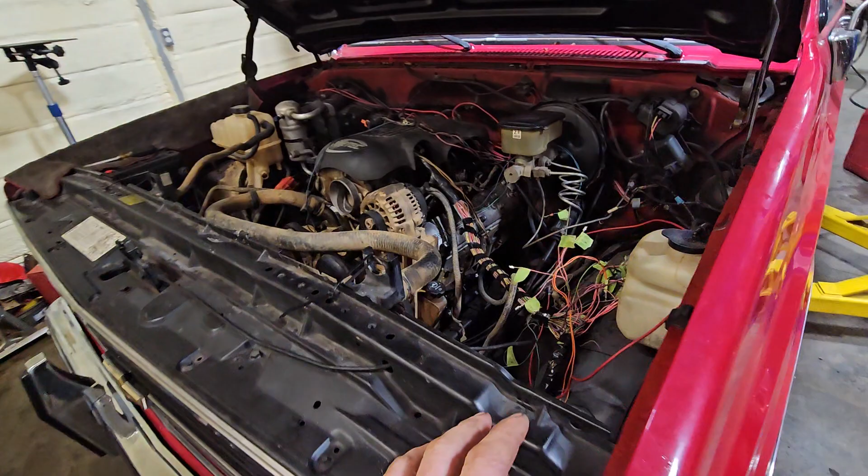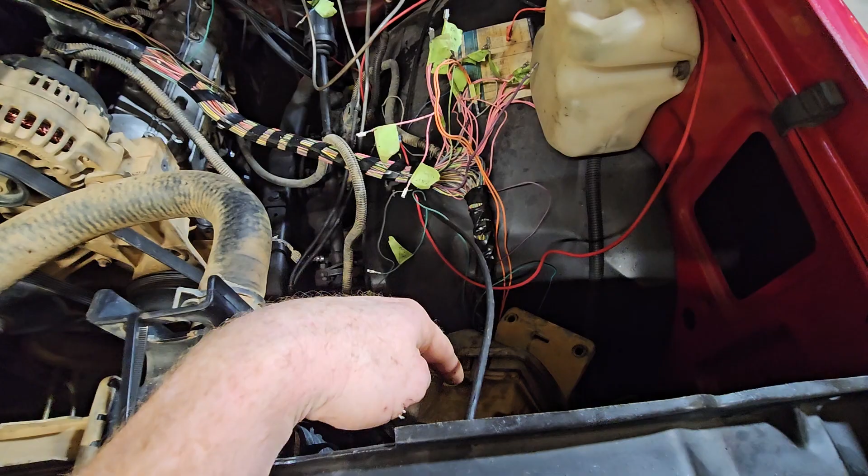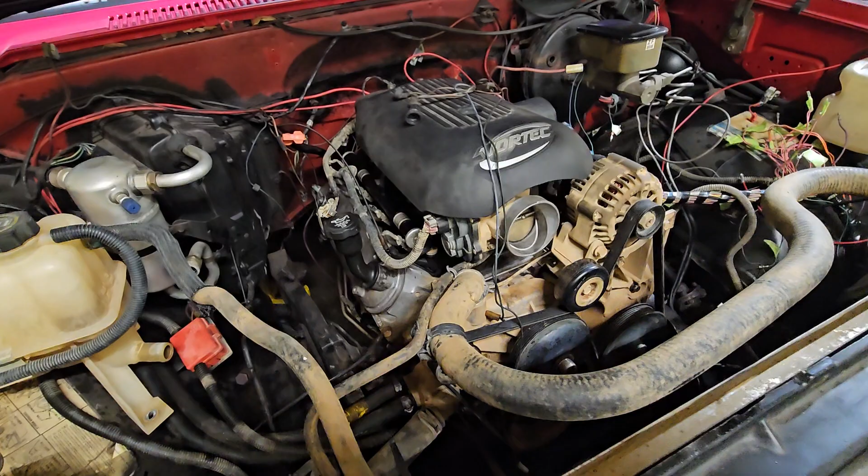Got the wiring harness thinned down and laid out. We're going to mount the ECU down here. The engine mounts came in Monday afternoon, and I went ahead and set the engine in. We already had the transmission cross member and just started putting everything together. Got the intake on, laid the harness on, put the accessories on, the water pump, crank pulley, all that stuff.

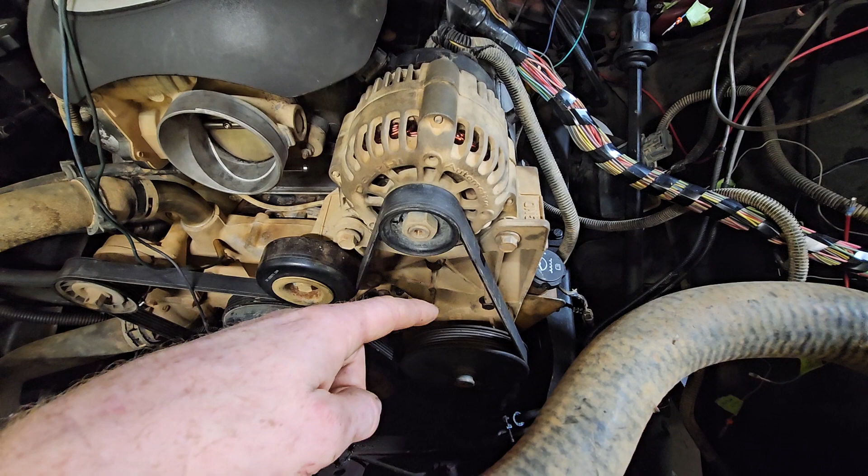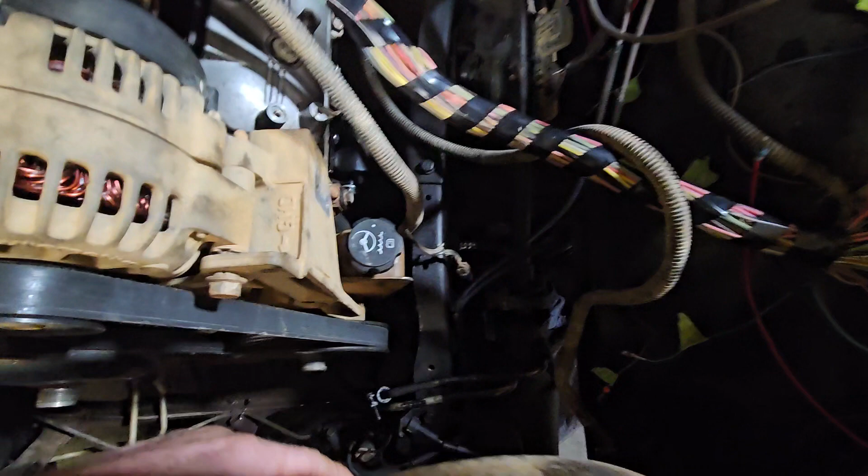On the power steering, what we've done is use the power steering pump and everything out of the fire truck, and I got the pump and lines that came off of this truck. If you take out the pressure side fitting from the old power steering pump and put it in this one, you can use the pressure hose and it'll hook up like it did, without any problems. That side's return, so it doesn't really matter since it's not under pressure.

So we got that hooked up and got our fuel lines run. All we did there was put, I think, a 340 pump in the tank with a little sock on it, attached it to one of the tubes that went down in there, and used that tube as the return. Then we just put a short piece of hose from the discharge of the pump to the bottom of the hat, and ran the wires and everything. It fit in there and should work fine.

That red wire there is our power wire to the pump. This intake out of the '04 truck was a deadhead, so I just switched the rails out so I'd have supply and return up here and use the stock regulator.

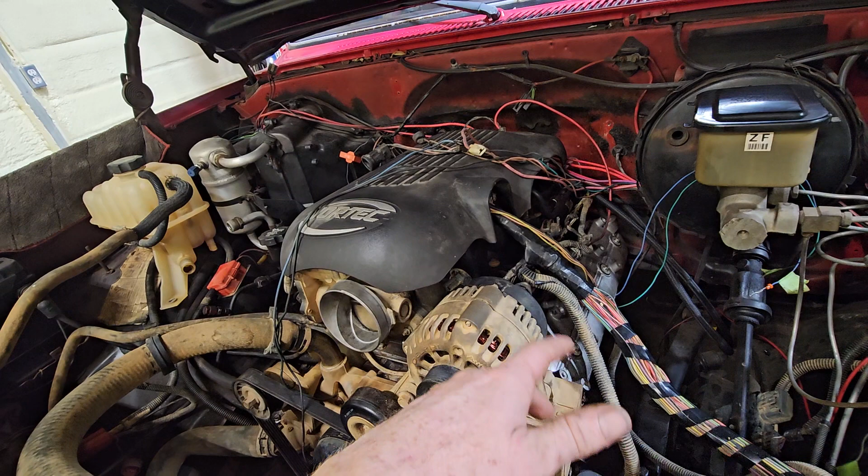With a 340 pump, it shouldn't have an issue maintaining pressure, because if the regulator is too small, you won't be able to regulate the pressure down to where you want it. These engines like to be at 58 psi fuel pressure, so we'll check it and make sure. If it's not big enough, maybe we can manipulate the orifice in the regulator to lower the fuel pressure.

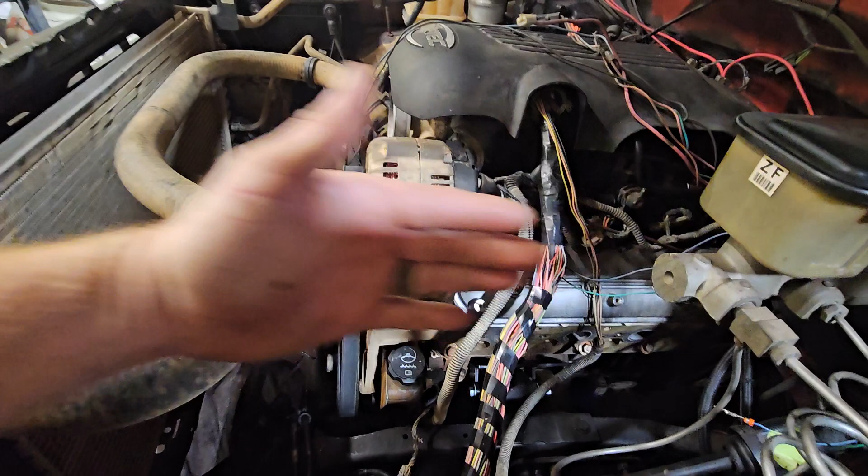So it's coming along pretty good. Got the drive shaft in. These mounts are actually adjustable, so you can slide the engine forwards and backwards. When I first got it in, the steering comes right across in front of the oil pan, so I tried to bring it forward as far as I could get it to the steering, because the drive shaft is pretty close.

So I've got to see where it is with the stance and everything on the truck. When you do the spring under and all that stuff, the mount has two different holes in it. I think it's in the rearmost position, which doesn't really matter - you want the wheel centered in the wheel well.

On the harness, what we did was go through and take out everything we didn't need, which was just some of the factory AC wiring, the rear O2 sensors, and the evap. There really wasn't a whole lot removed from the stock harness, and then everything comes down to this.

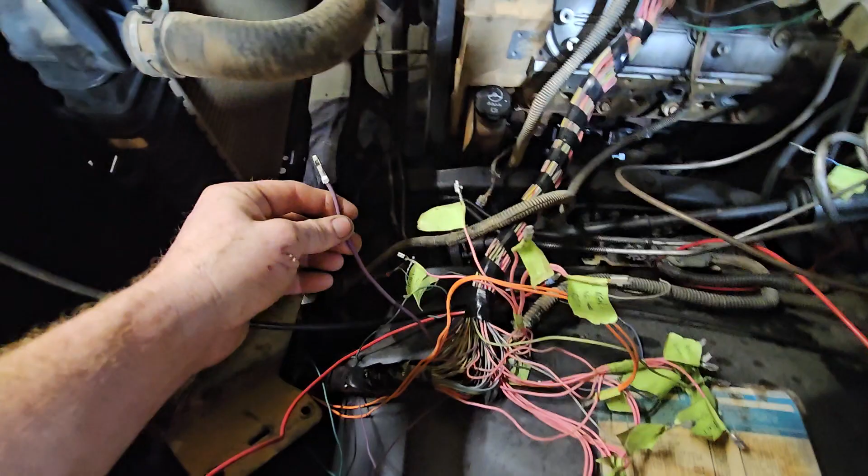Purple is your starter wire that goes in front of the engine around to the starter. Coincidentally, this truck has a purple wire. I have it laid down over there to the starter, but I'm going to pull it from this connection at the firewall and connect it in.

Your orange wire there is constant power, and the pink wires are your keyed power. What I've done is grouped them together - this will be one fuse, this will be one fuse, and one more fuse, and one fuse. So I think I'll have 4 fuses for keyed power, for your coil packs, your O2 sensors, your PCM keyed power, your injectors, and stuff like that. That's how I have them grouped.

We ordered the fuse block, and it should be here today, I believe. Then you've got one of these that goes to your brake light pedal.

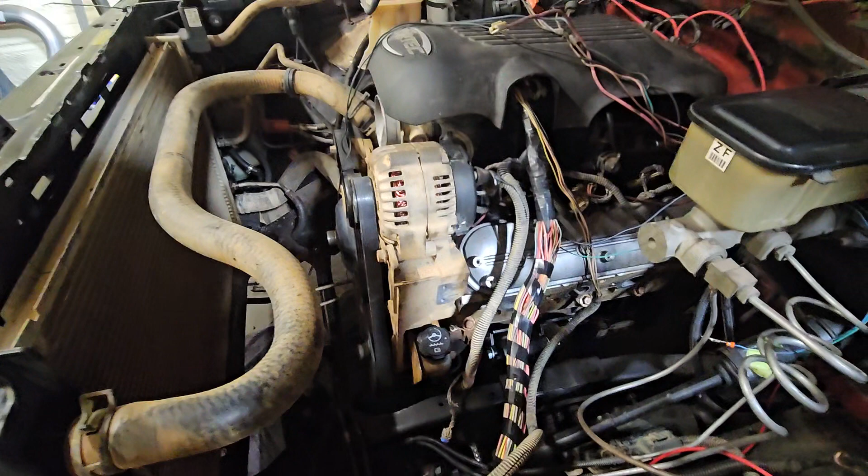That's your fuel pump feed right there. But the one that goes to your brake pedal, there it is. That tells the computer that your foot's on the brake, so it'll unlock the torque converter, because otherwise if you don't hook that up when you come to a stop, it'll keep the converter engaged and it'll push through. So you have to hook that up, and every vehicle before they did this was backwards from what it should be.

So you have to do a 5-pin relay to reverse the polarity. Normally when you push the brake light it sends power, but this one gets power all the time and then it takes it away or something. I don't know why they did that, but anyway, it's just more wiring and whatever.

Here's our tach module down here. We'll mount it somewhere. I haven't figured out where I want to mount it yet. I haven't got that far. But we got our fuel filter and converter in. Transmission lines are run to the front.

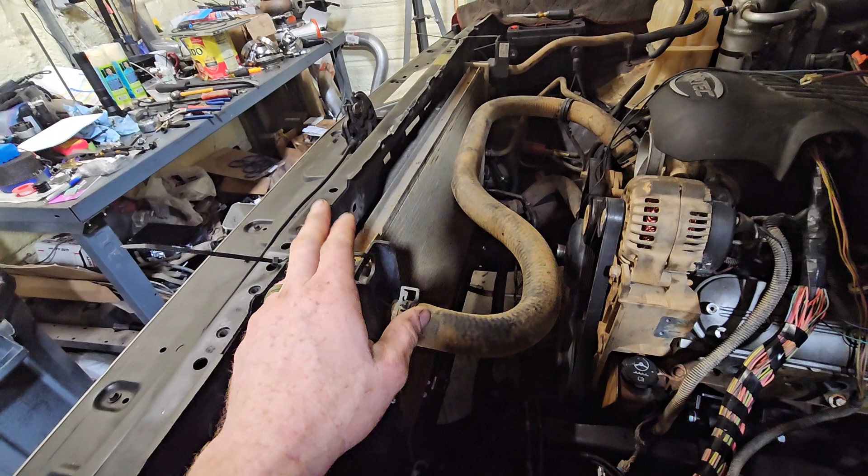One little hiccup we had is apparently the 04 truck had a mechanical fan, and this radiator is actually shorter lengthwise for the electric fans. We got them in yesterday, and the width difference is incorrect. So I don't know why. I mean, that was a V8 Chevrolet truck. I don't know why it had the shorter radiator, but now we got to figure that out.

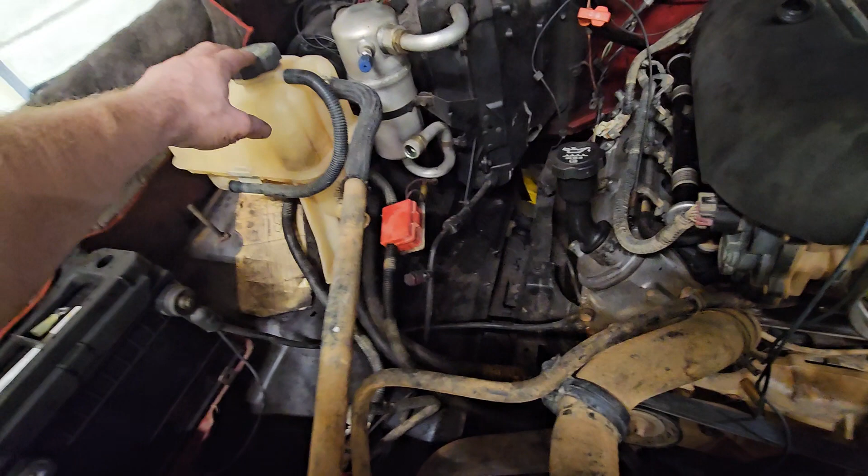And then put the expansion tank up here where the spare tire jack and tools were, because we won't be changing flat tires. We used the power wire battery cable from the 04.

And then the 2 wires coming out now, they used to go to the alternator, and I hooked the ones to the truck. So these red wires come across and go to the power to the truck, and then there's a wire in the harness, this looped one comes up to our alternator, so that can feed and charge everything for us.

And what I've done is these are the wires that go to that firewall connector. This is for ignition power, so that should be our keyed power source.

One thing you want to look for when doing a keyed power source is you want to make sure that it maintains positive 12 volts in the start position, because not every wire does that. So you can get it all wired up together and it'll sound like it's going to crank, and then it'll never start because it's losing power as soon as you go to the start position. So that's one thing you need to double check and make sure you're using.

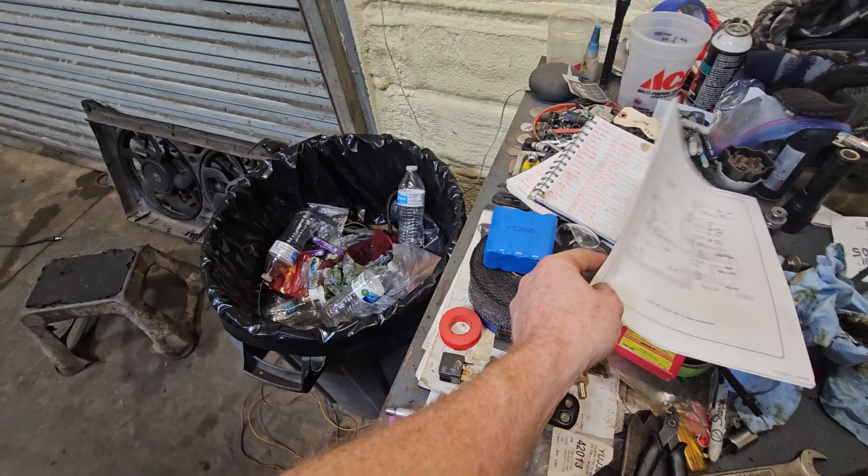Let's see what else we got. So we got these right here. Found this online. This is a wiring diagram for the 84 truck. So it has this connector right there, that's the one I'm going off of back there across the firewall.

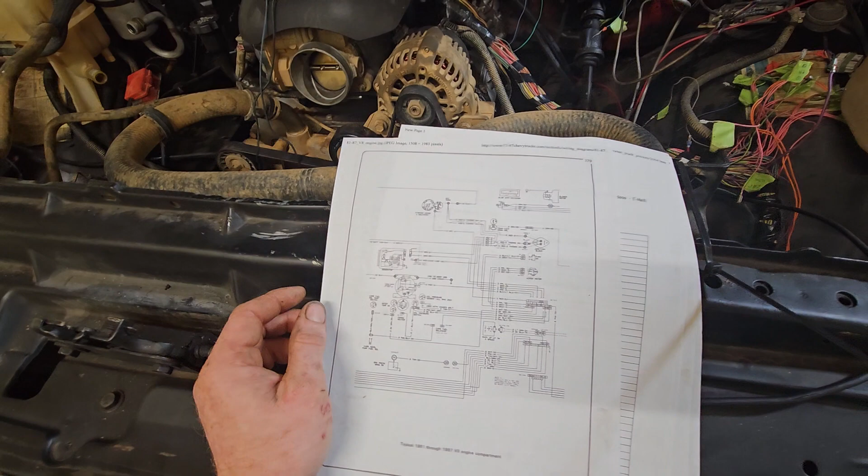So I'll be going through and using what I can out of here to power things. I will not be using any of the sensors off the old engine, number one, because I don't have them, but number two, I don't know if this truck has gauges or idiot lights. I haven't looked. In a newer one, if you're doing a swap and you want the gauges to work inside, you want to keep the sending units and stuff off the old engine so you can put them on here.

Now that being said, the problem with these is these are all metric crazy fittings that are different from an 84 fitting. Which is crazy because the 84 was like when they were integrating the metric and stuff, so you don't know if it's a 3/8 or a 10 millimeter on these things. It's very confusing. So anyway, there's that.

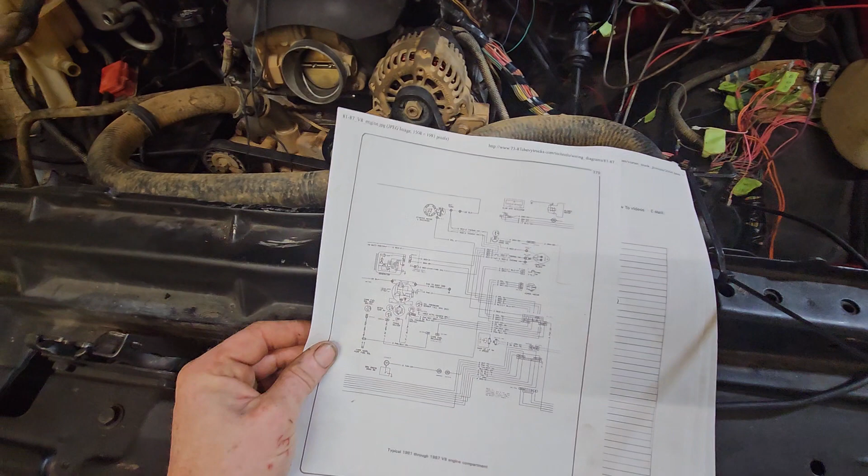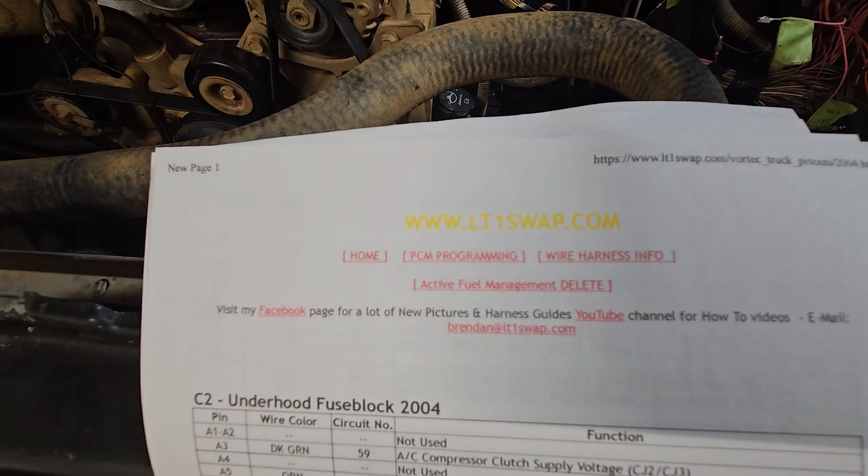I'll be going through there and getting what I need, getting rid of what I don't. And then this is off LT1swap.com. So there's a wealth of information.

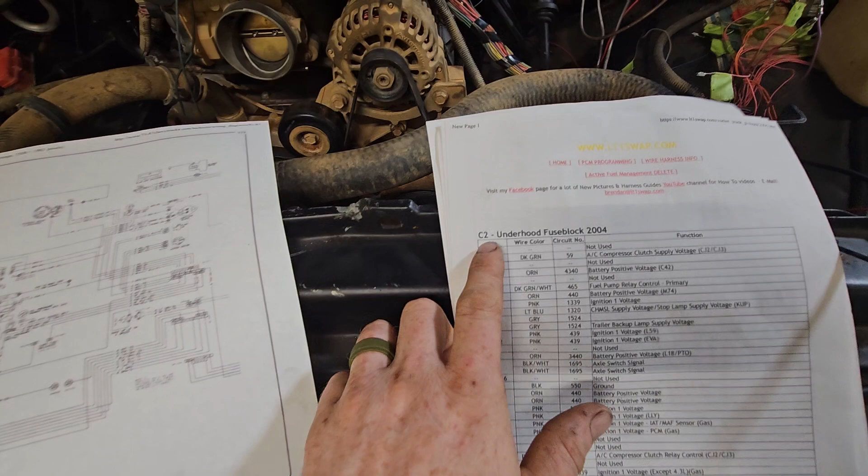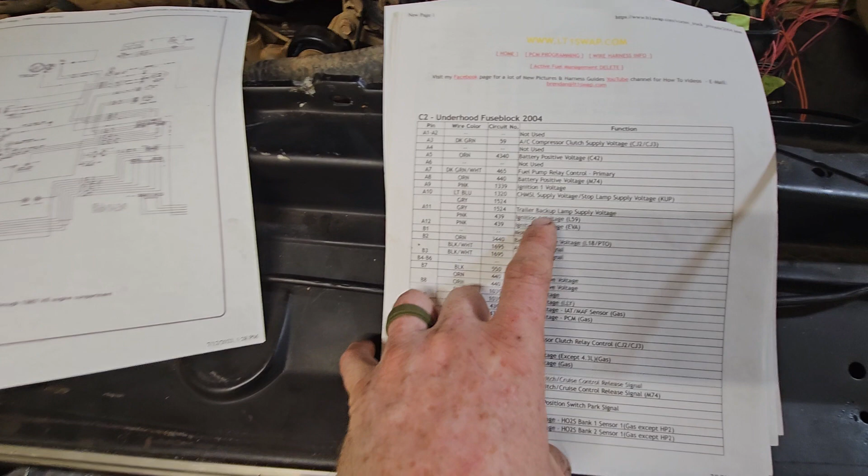So these are all the pinouts for the C2 connector that all these labeled wires were pulled out of. If you watch my other video where I show how to start one of these using the fuse box in the truck, this is the connector that they all go to. So the C2 connector, as you see right here. All you do is go through here and if you're not using it, just remove it. Like the trailer backup lamp voltage, we're not using that.

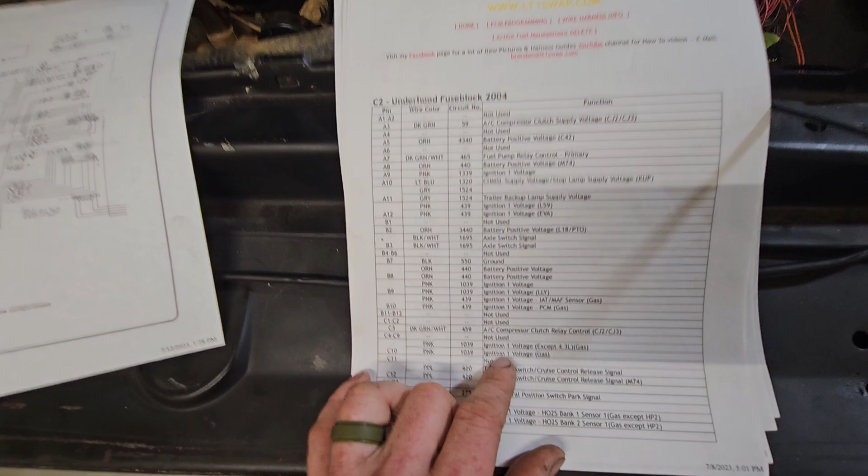Most of this stuff you're not using, but all the pink ones get keyed power. Now this one doesn't go in depth and tell you what it is, it just says ignition 1 voltage. So I used a multimeter and figured out what it went to so I could make sure both my coils were on the same circuit and all the injectors are going to be on one circuit and that sort of thing. But this goes through.

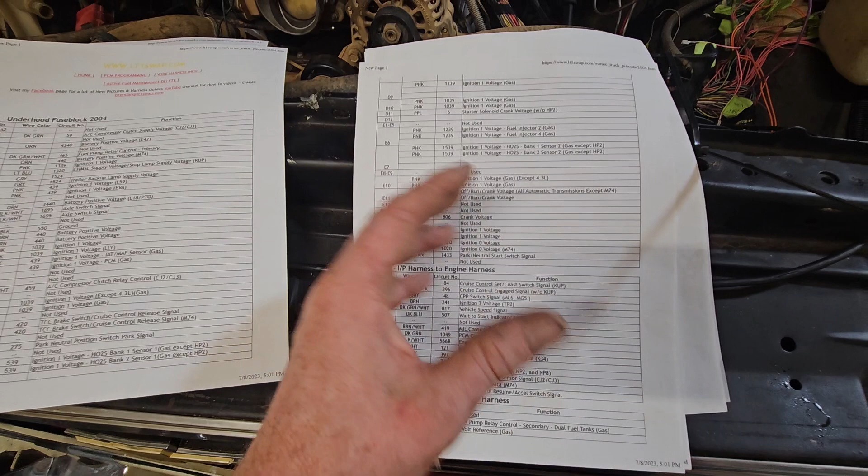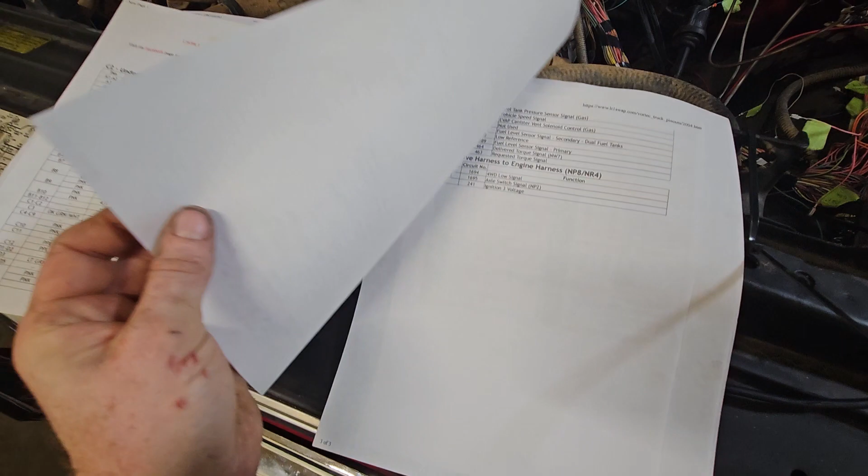These are all of the pinouts of all of the connectors that are under that fuse box in the 99 and up trucks. So like I say, you just go through and give it what it needs and remove it if you don't need it. This is another connector, the 4-wheel drive connector, so obviously we don't have to worry about that.

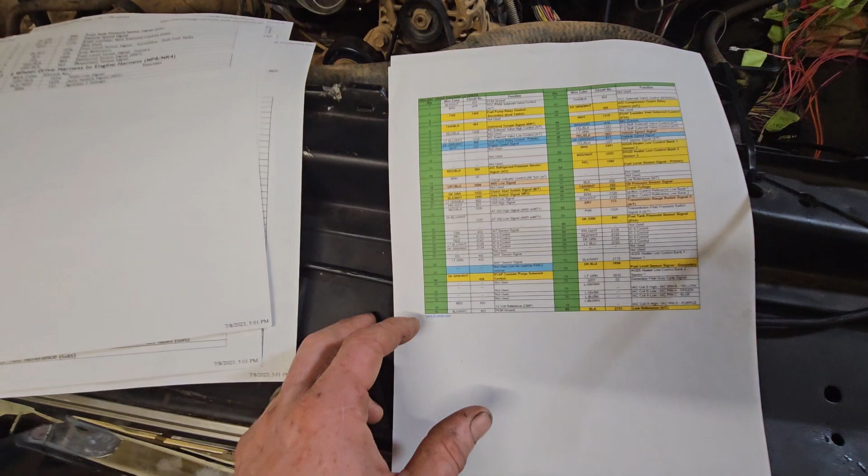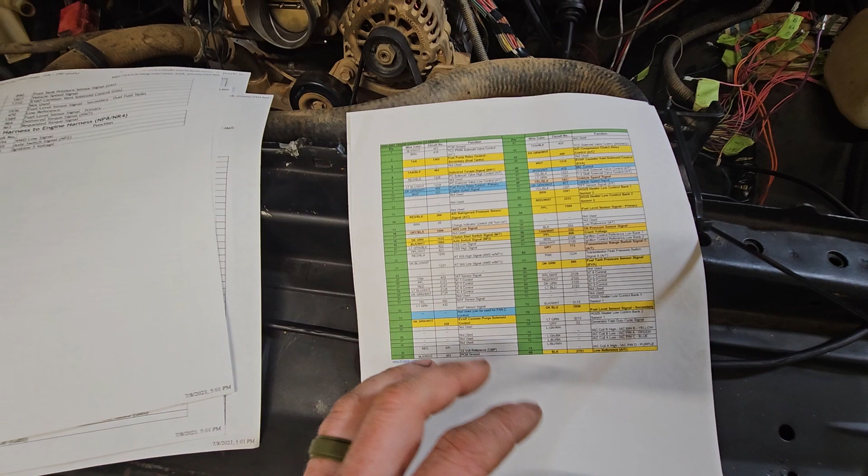Now this is your pinout diagram. This is for the green connector, which plugs into the ECU down there. All these yellow ones are the ones you remove. So just go in there, take the connector apart, remove the pin, and then take the harness apart and trace it all the way back and remove it. Or if you're lazy, just cut it and tape it up in the harness and cut the other end so you don't have to de-loom it, but that's your choice.

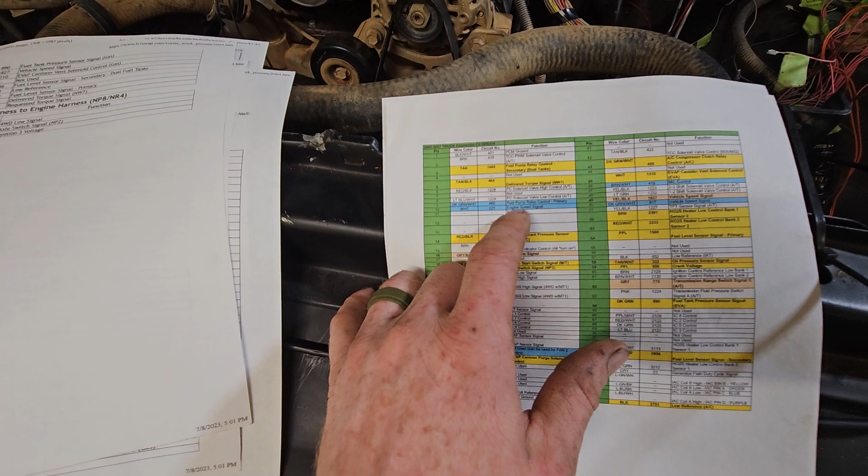So the blue one, that's your fuel pump wire. The engine speed signal, this guy uses the pinouts from here to run gauges and stuff. So that's your RPM, and then that's your check engine light, and then that's your mile per hour speedometer.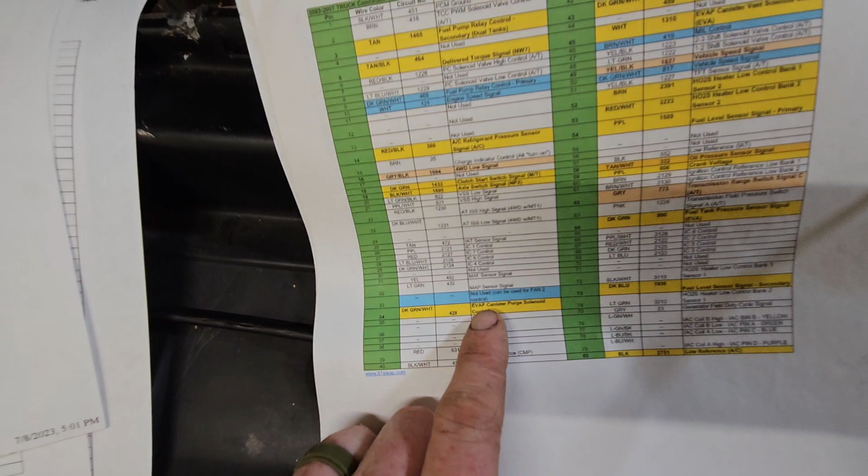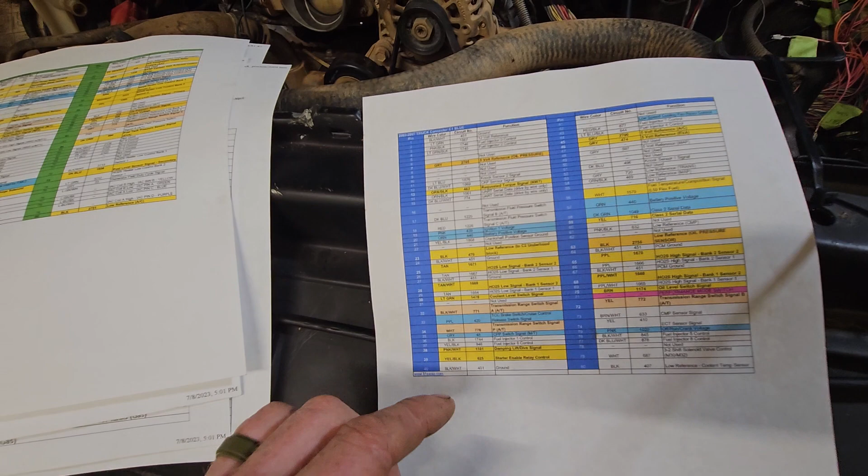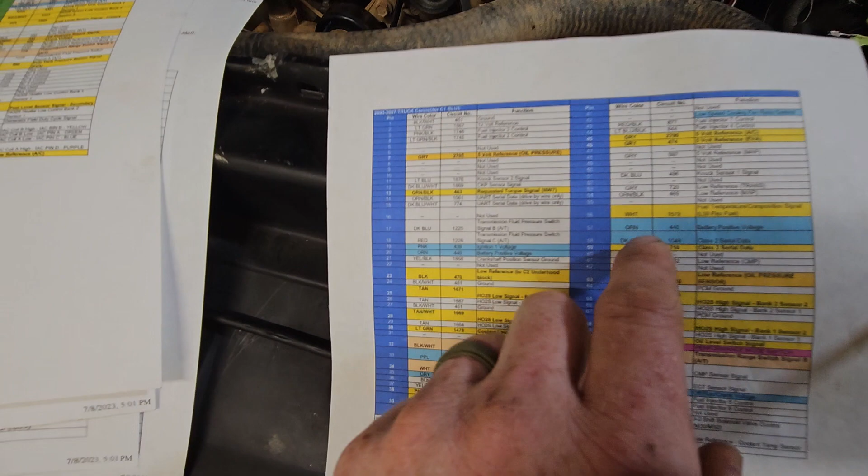So that's the one you repin for your electric fans. And that one only comes on with AC, I believe. So, here's the blue connector, same thing - remove all the yellow ones, you use the blue ones, and that's your OBD2 right there. The orange is always constant power, and pink's keyed power. So that's how you can go about doing the harness.

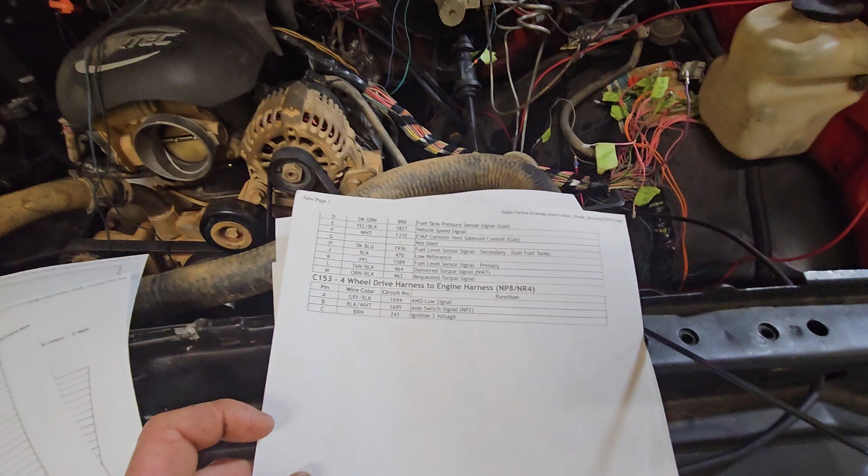It can be overwhelming, but it's not that hard. You just gotta take it one wire at a time, because otherwise you'll just get overwhelmed with, oh my God, I got all these wires right here.

And the main thing is to lay it over an engine, plug in everything that you can plug in, and then just start taking the harness apart and de-looming it. And you want the harness to keep its shape. So what I'll do is I'll put a couple pieces of tape after I've gotten the wires out I don't need, to try to make it hold its shape, because otherwise, once it loses its shape, you're screwed. It's a lot more difficult to bring it back into shape.

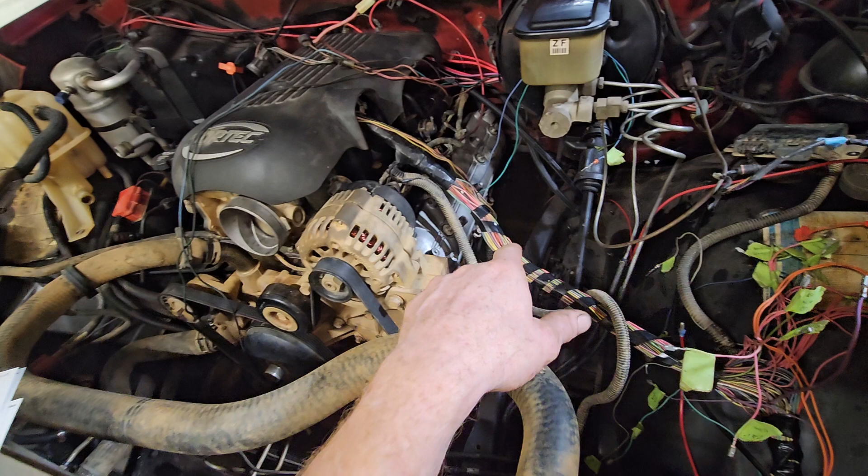So the Denali headers did not fit. I was kind of surprised by that. The tubes come out too far and hit the frame rail down here. They're just - I was really surprised they didn't fit, to be honest with you. But the new header should be here today.

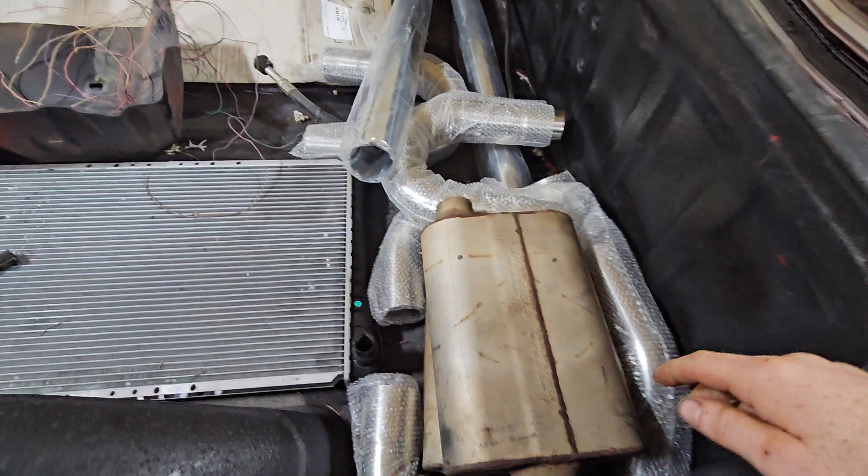We got our exhaust kit, so that's back here. The customer wants to run these amazing Flowmaster mufflers.

So I've cut them apart, and what we'll do is we'll just come up here and open these up so it'll fit a 3-inch. This exhaust kit came with 2 4-foot sections, 2 U-bends, 2 90s, 2 45s, and it's stainless. Like I mentioned in one of my videos, I would normally get one of these in mild steel or something, and it comes with 4 of everything I just mentioned.

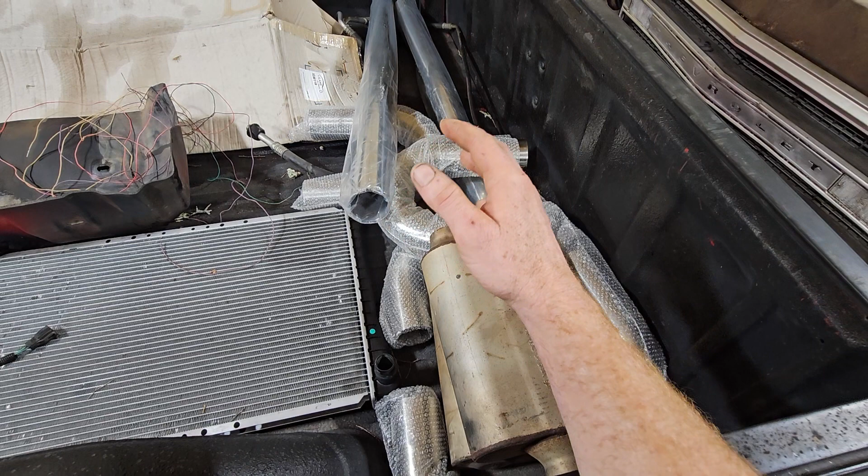The problem is, though, after some time, it looks like crap. I mean, the flash rust and everything, they look horrible. So I've started getting the stainless ones so it'll last and hold up a little better.

There's his old radiator. Here's our drive-by-wire pedal here. This is kind of a crazy one.

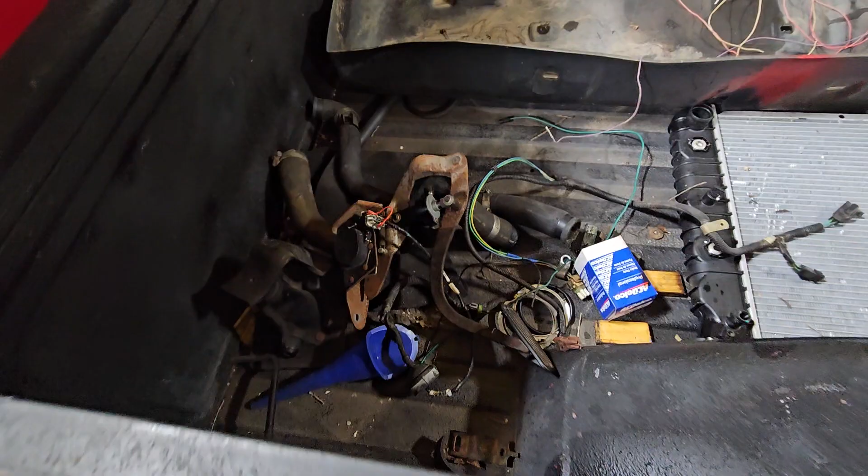I don't really mess with drive-by-wire that much, but this is crazy. It comes up, and I don't know what this thing is. This plug has almost all but one wire in it, whereas the wire harness out of the truck, well, it got burned up, so I don't know how many wires were in it.

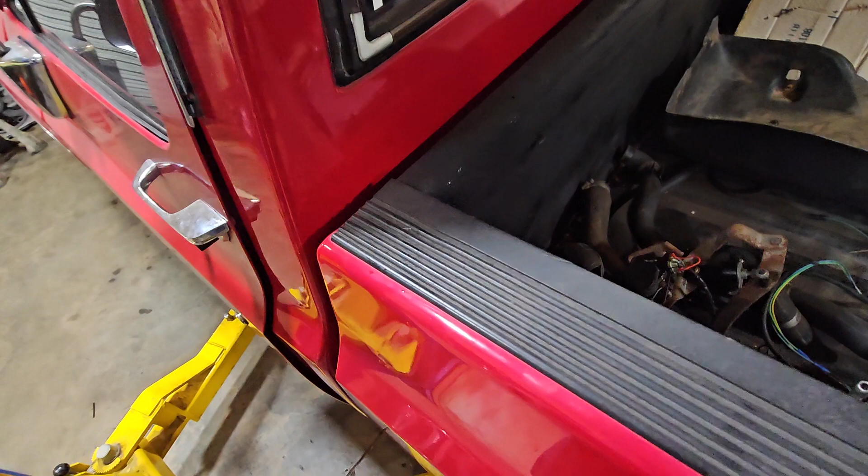The wire harness I have up there doesn't have all the pins pinned in it, so let's see what it does have, what gauges it has together here. Let's see, oh, so we got a battery light, temp, oil, okay, speedometer, fuel gauge.

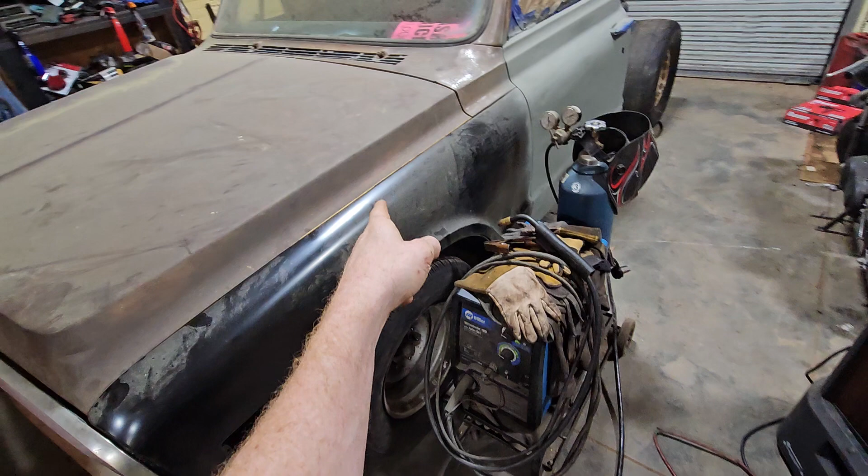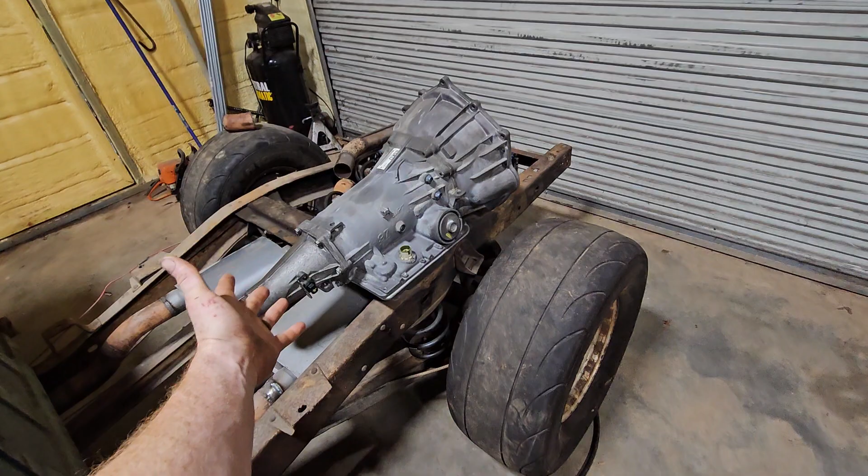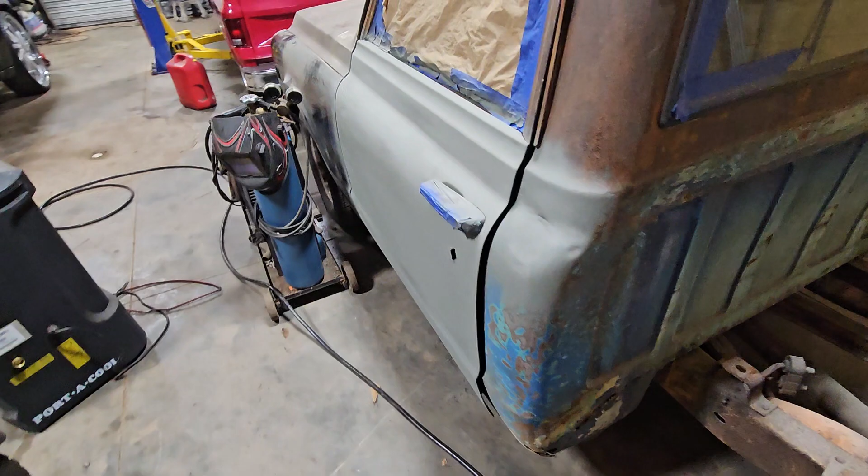And speaking of transmissions, we have our transmission. Picked that up from him - he was out of town and messaged me and said it was done and he'd be back in town. So got this thing. Hopefully it'll hold up pretty good, and whenever I get it where I can drive it off the lift, then we'll mess with this thing again, hopefully. So that's where we're at on that.

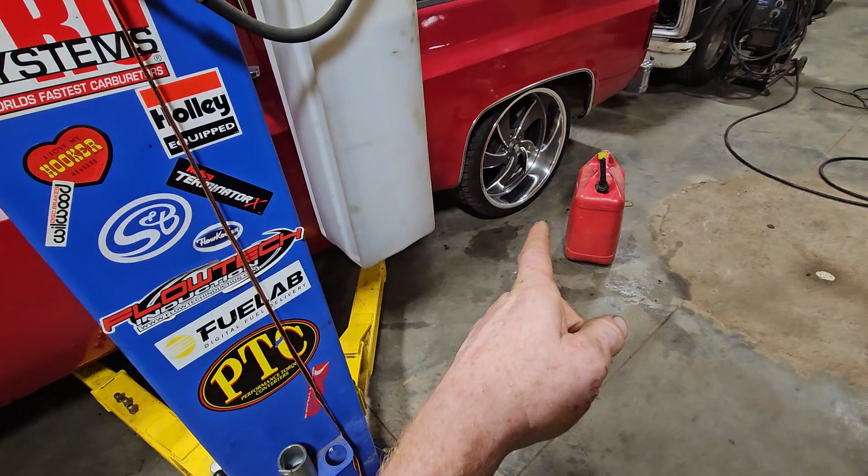I don't know what else there is to go over on this thing. I got to put new wheel cylinders in it because that one's leaking, but I'm not going to just change one of them. The front obviously has to come down.

He was thinking it was going to come down a lot with the engine and trans in it, but I kind of knew better, so now I've been instructed to go half a coil at a time to try to get it down. So I might not tell him and just go straight for 1.5 or something and see where that puts us. Then we can just buy a new lowering spring if I go too much.

I don't know if I mentioned this on one of the videos yet, but this brake line right here - somebody teed this thing in, and this piece comes out of the bottom and goes into some kind of brake controller in the truck, and then a wire came down and ran all the way to the back. So that was pretty wild.

I've never seen that before. I guess it works off the brake pressure, I assume. But I'll be removing that because now we won't be towing anything with this truck, but we will have the power to tow with it.

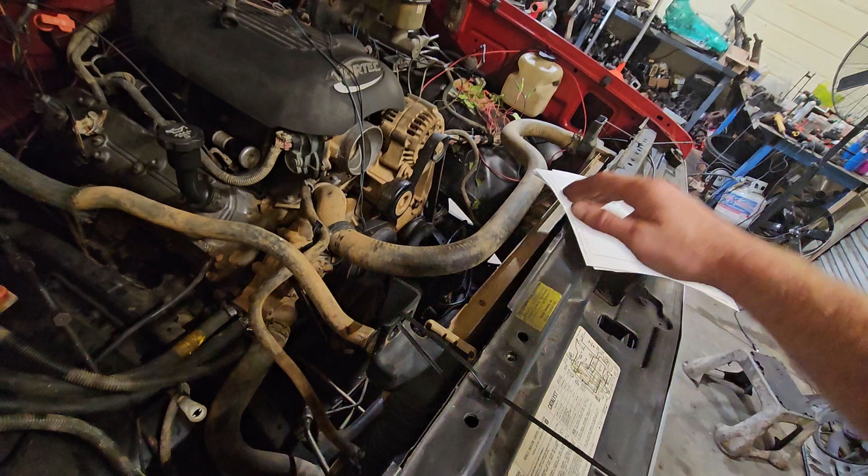So these are only temporary. And good thing too, because I'm going to have to redo everything to fit the longer radiator. But it's coming together pretty good.

Hopefully the headers will get here today, and I'll be able to - I'm hoping that they'll slide in there. I hope I haven't screwed myself by having everything already in and together. I just figured it's a truck, there's plenty of room to work on it and don't have to worry about it. But boy, was I wrong, as usual.

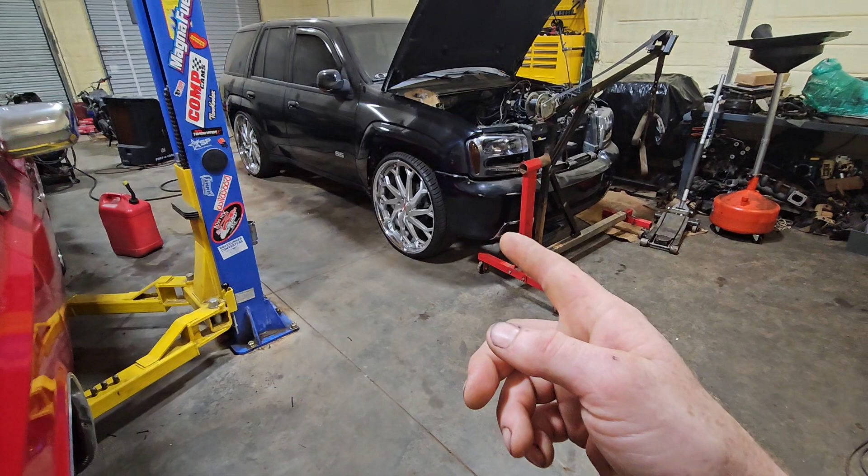So anyway, that's the update on this thing. We're still waiting on the engine for the Trailblazer. I'm supposed to go down there tomorrow to dyno the Bronco and get it sorted out, but this week's been so hectic and everything's gone sideways.

I got a lot dumped on me yesterday. I've got a project or a job that fell in my lap that I did not want to do, but I'm hoping I can finish that up this morning and be done with it, then maybe get freed up where I can go to the dyno tomorrow with Michael and see what kind of massive horsepower the Bronco puts down, and hopefully return home in it the same day under its own power. So anyway, that's it for now.